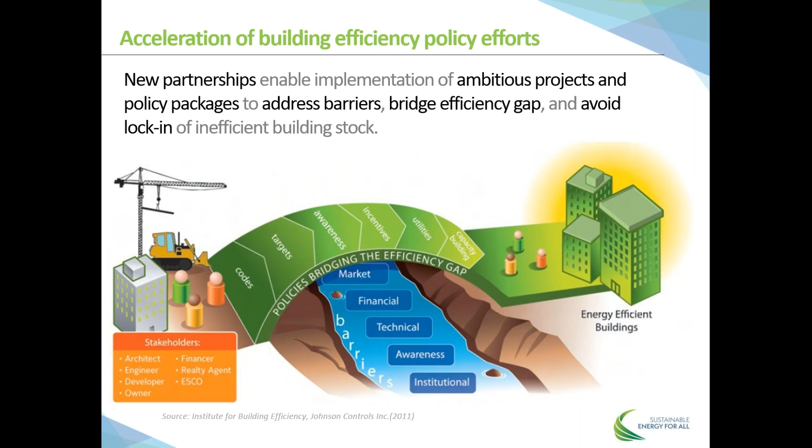The barriers that we see in energy efficiency are not technical, they're not economic, they're primarily around institutional action and capacity to take action. And we feel as though the accelerator is already helping to bridge the gap in efficiency investment. So what are cities signing up to do?

Primarily 3 things in support of this overarching commitment to double the rate of energy efficiency improvement within their jurisdiction. They're committing to implement 1 enabling policy, implement a demonstration project, either in a building or something that's visible to their community, and then to track and communicate their progress toward more efficient buildings in their community.

And the Building Efficiency Accelerator provides in general 4 different categories of services and support to help them do that. Local action prioritization and tools and expertise, 2 things that we're going to be talking about a little bit today, some of those tools and how cities can go through the process of identifying, prioritizing, and sequencing the actions that they feel to be most important to their local needs.

The accelerator is also helping to connect projects to funding for them and helping with that process of translating a good project into something that's also fundable and financeable by entities with capital. And then finally, providing more international recognition and collaboration for those actions that are happening locally, helping them learn from their peers, as well as getting recognition in global forums for the action they've taken and inspiring others.

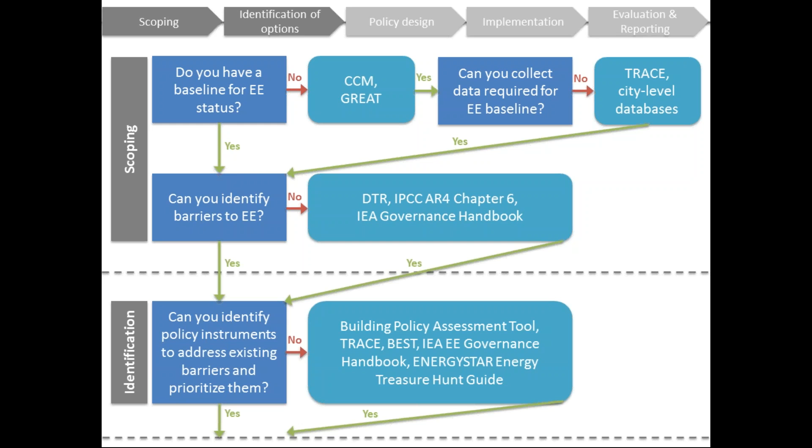And these two stages were covered under our previous webinar, which took place in November, where we looked at carbon metric and trace tool developed by World Bank as case studies. The recording of this webinar is available on YouTube and you can access it with the link.

During today's webinar, we are going to focus on policy design, and three tools which are going to be featured today will focus on this stage of development.

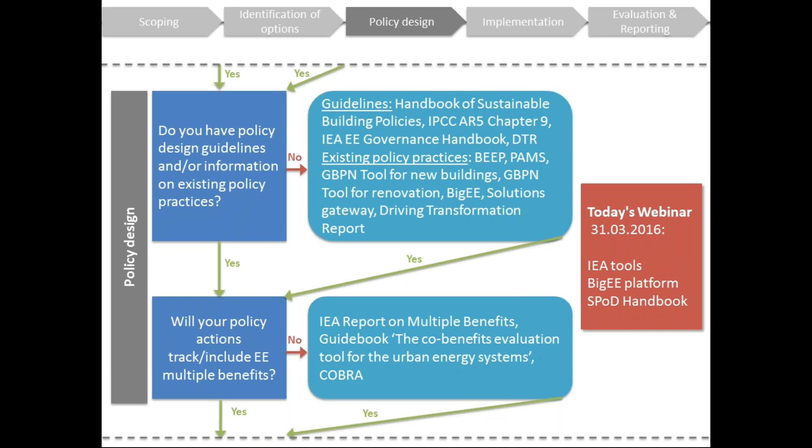Here at this stage, it is very important to look at existing guidelines and existing policy practices which are available in a number of sources, as well as for cities it is quite beneficial to include multiple benefits to energy efficiency in their policy design.

The last stage is evaluation and reporting, which focuses on tracking the impacts of policies and projects for energy efficiency improvement. Here we separate tools which are focused on policy development and project design. These two stages will also be covered in our upcoming webinars, so please follow our updates and we will inform you of any webinars we are going to host for Building Efficiency Accelerator.

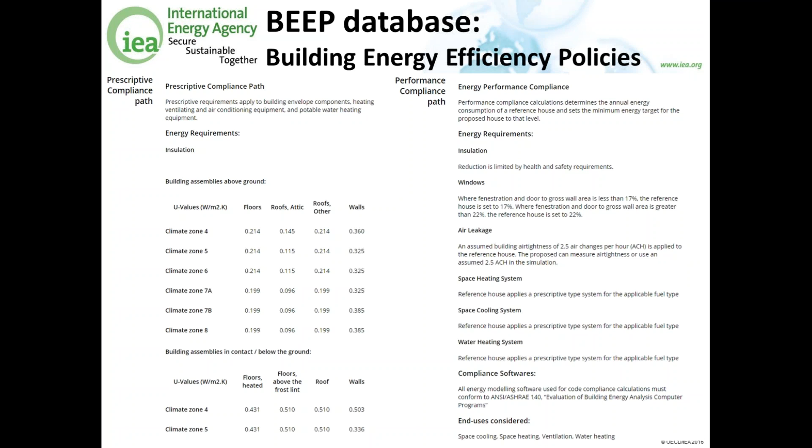This level of detail is more useful for jurisdictions when they're looking to determine what kind of requirements they could set in their own region. We aim to have this level of information on all building energy efficiency policies and standards globally, although it's still a work in progress, as everything always is.

For the data and indicators, there's a database set up through our statistics division, where the IEA collects data from all the countries globally. As part of that effort, you can see there are different data types, or methodologies, and content available here, such as survey instruments, modeling instruments, and things like that.

Just like PAMs and BEEP, once you sort into it, you can see, so this is a series of residential surveys. You can click in country by country to see what types of residential surveys are available, and potentially create your own survey instrument based on the questions asked by other countries.

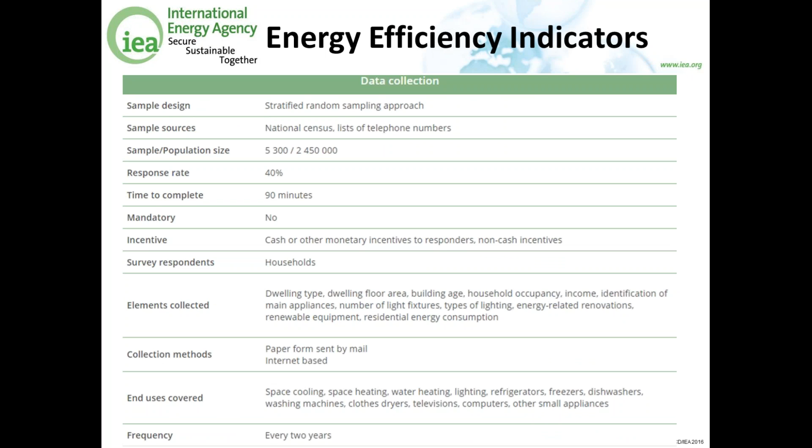There's some high-level information like this, such as what's the intent of the survey instrument. And then there's also more detailed documentation available for most of the details in this energy efficiency indicators database. In this particular case, links to the U.S. Department of Energy's Residential Energy Consumption Survey and the survey instruments used for that survey.

So those are the databases. I think these are helpful for many jurisdictions, and hopefully they'll be helpful for you as well.

However, many of the other aspects are just now starting to become quantifiable and are being talked about when analyzing policies to understand the effectiveness of those policies. This book has done a good job of helping to set the baseline for what types of benefits and how to quantify them, and more work is ongoing as well.

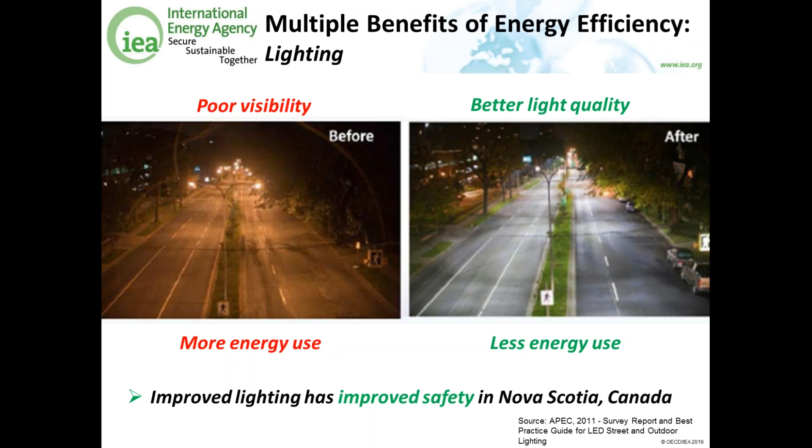One of the multiple benefits, I like these pictures because it illustrates very clearly a before and after of an energy efficiency project. Clearly what you have on the right-hand side is much better visibility, you can even see the crosswalk signs much clearer. So what you're getting is better light quality, improved safety, and all of that with less energy use, and oftentimes less maintenance costs and many other benefits going into the future.

More than this being something that could be used in all locations, it's more about the methodology, such that you could actually quantify the impacts or the benefits associated with each of the generation, transmission, distribution type activities, and put those benefits into the cost analysis associated with your policy development.

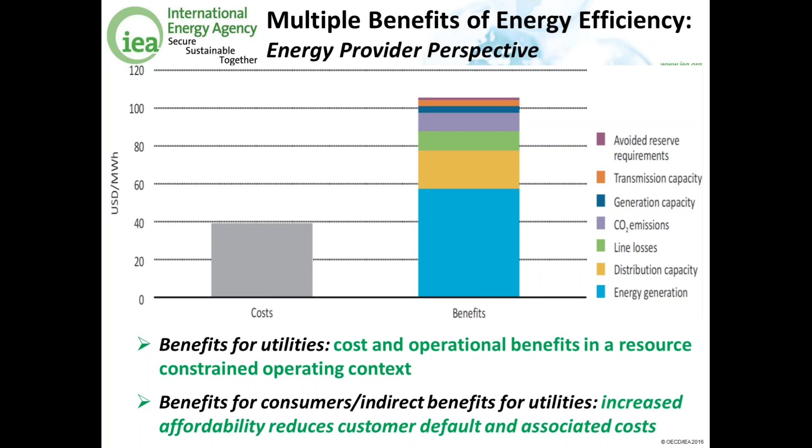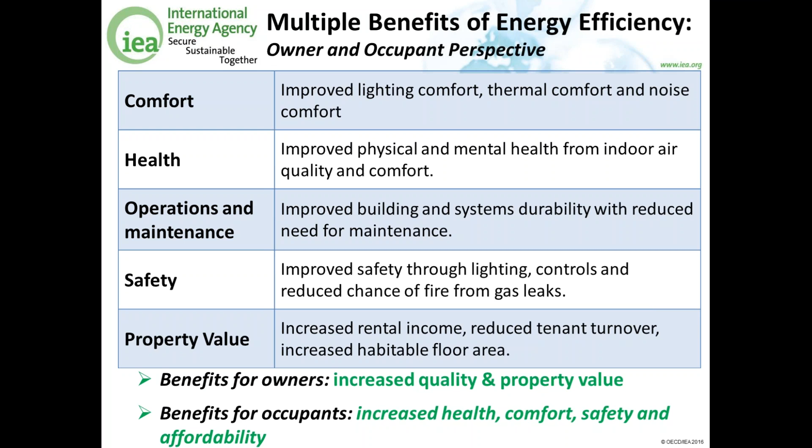Then there's another range of perspectives, and I won't go through each of these upcoming slides, but I just want to show you the high level: there's owner and occupant perspective, oftentimes talking about the quality of the building and health and comfort type issues. There's an industry perspective, beyond buildings, looking at productivity and value creation, and lighting and other things can bring increased productivity.

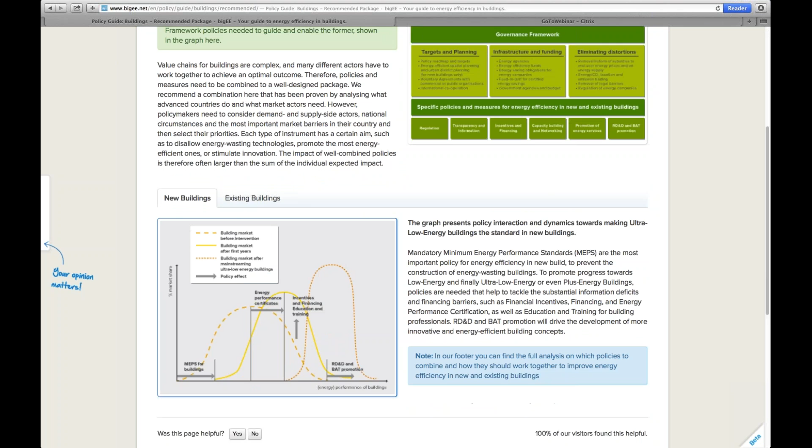Eliminating distortions means getting the energy prices right, for instance, or removing legal barriers. Then we have the sector-specific policy instruments, and the way they interact is presented in graphs here. It's basically the same policy instruments for both new build and retrofit, but the way they interact is different, and the target for existing buildings is two-dimensional: increasing the savings in each retrofit on the vertical scale, and increasing the rate of renovation to high energy efficiency levels per year.

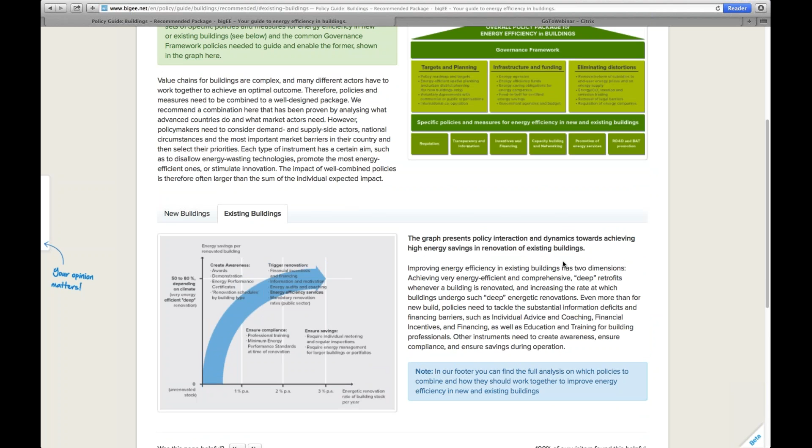From this overview of how policies need to interact in combinations and packages, I'd like to go on to the elements. For each of the 9 categories, we've identified different instruments that perform different objectives in the package, serve to overcome different types of barriers, sometimes also targeting different actors. They're sorted by the 2 broad categories of governance framework and specific policies, then the 9 categories. You can click and see the types of policies for which we have detailed information on how to design and implement. These are around 30 policies, but not all equally important, so those marked with a push pin are priority policies.

I'd like to go to the minimum energy performance standards, or energy building codes as another word for that. As I said, we have first key information here on top, for instance, that advanced countries have already achieved energy savings of 50 to 75% in today's new buildings with their policy packages, and then secured this through the building energy codes.

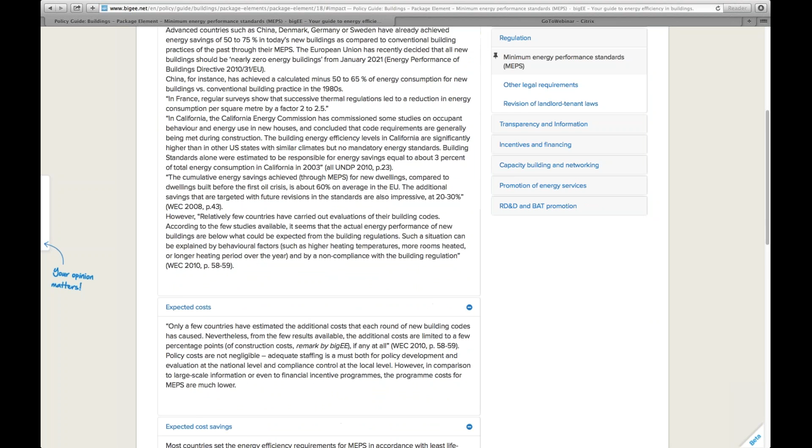Finally, we also have a section on impacts. What can you expect from this type of policy in terms of savings that can be achieved, also having information from real-world examples, what are the costs for implementing this type of policy, and what are the cost savings, including energy cost savings or other cost savings associated with this type of policy. We can expand to show the level and amount of text you can find here. Also, for each type of policy, if we have a good practice example from the real world, you can find it at the bottom of this page.

So for cities, especially the question is which policies should you combine. They all have specific functions in the package, as I said, addressing barriers or improving incentives. So you should analyze what is most needed by the markets and actors in your jurisdiction. And then, of course, some policies can be better implemented at the national level, like in many countries mandatory policies or tax policies, but some also at city level.

For instance, is there a national financial incentive program in place for buildings? Then you could just try to communicate it in your jurisdiction and network in the city to increase the number of applications from your city. Or if there's no such national incentive program, you could consider if you have the resources to implement one in your city.

In addition to this general information, we also have two types of policy examples. One type is examples of policy packages that we consider good practice for their congruence, policy interaction and effectiveness, although not all of the individual policies may be among the best of their type.

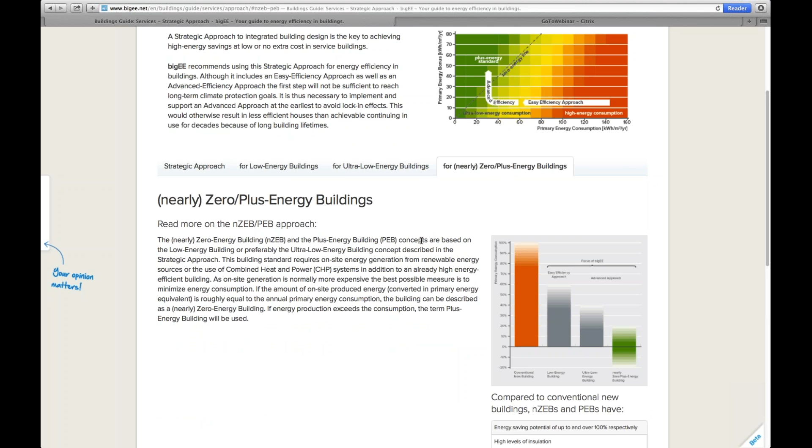Here for the buildings, we've distinguished three pragmatic steps of increasing energy efficiency: from low energy buildings to ultra low energy buildings like the passive house, if you have heard of this, and to nearly zero or plus energy buildings that make more use of renewable energy to cover the remaining energy needs.

And for these types of buildings, you can get detailed recommendations on energy efficient design and optimization. You can choose your climate, whether it's a new build or retrofit, the mode of a building, the size of an office building, and then click and get recommendations shown, which are very detailed, giving information on an integrated design of the buildings to reach those levels of low energy, ultra low energy, or zero plus energy buildings, and for the different passive and active design options, which are the elements of the integrated approach to building optimization.

Here we are currently adding more detailed pages on passive design options, active technology options, and energy management and user-related options for optimizing energy efficiency in buildings. And finally, we also have some examples.

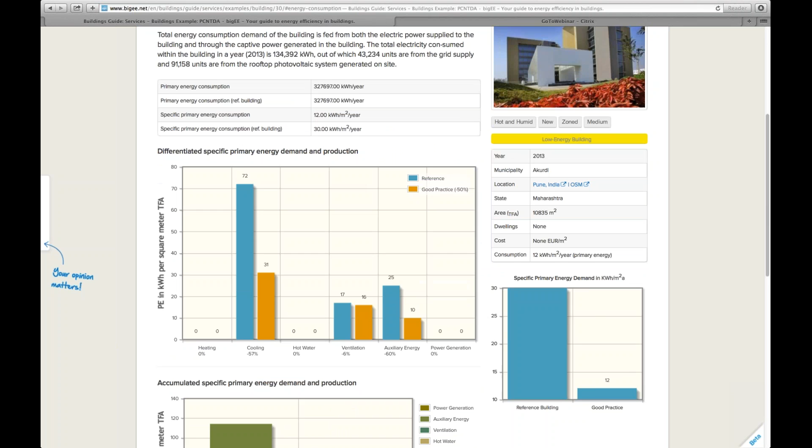Again, as with policy, we aim for rather few but well-documented examples that also present detail on the construction, detail on the energy savings compared to a reference building. You see in turquoise the reference building, and in orange the good practice building. You can compare the energy consumption for different end uses and overall, and also, if the information is available, compare the annual costs for the reference building and the energy efficient building.

So finally, here at the top you see the link to the country projects, and if you know of any other good practice examples for buildings or policies that are evaluated and documented in a comprehensive and convincing way that we want to present, please share them with us. And with this I close with a big thank you and hand over to Benigna Boza-Kiss.

Thank you very much, Stefan. And thank you very much to the attendees. I'm impressed how many, what a great number has been present. And I would like to continue with examples of the tools that are available for local experts and local policymakers to have in their work.

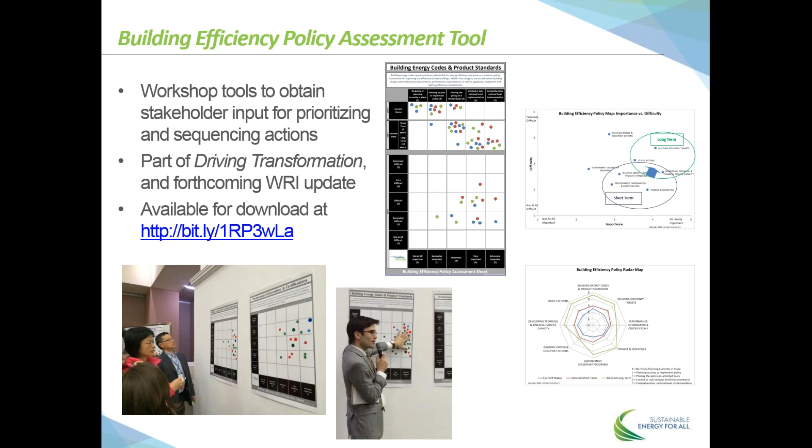And then I also just wanted to touch on how this has actually been used in a particular community. And when I say this, I mean the process of kind of policy design and development. The Building Efficiency Accelerator is engaged in those dozen or so communities, as I mentioned, but the one where we've been most deeply engaged so far, and have kind of the longest track record of activities, is in Mexico City. Mexico City was one of the first cities to commit to the Building Efficiency Accelerator in September of 2014.

Starting in March of 2015, the Building Efficiency Accelerator partners have helped to facilitate a process starting with developing a common vision and moving through a process of identifying and prioritizing actions, making recommendations to the city, and then helping them to actually begin implementing the program of actions identified.